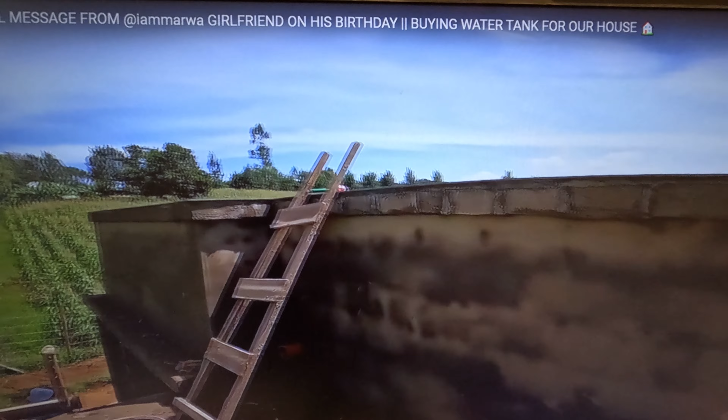Here we go. Already this place has been plastered and so I'll just rewind a little bit so we get the context.

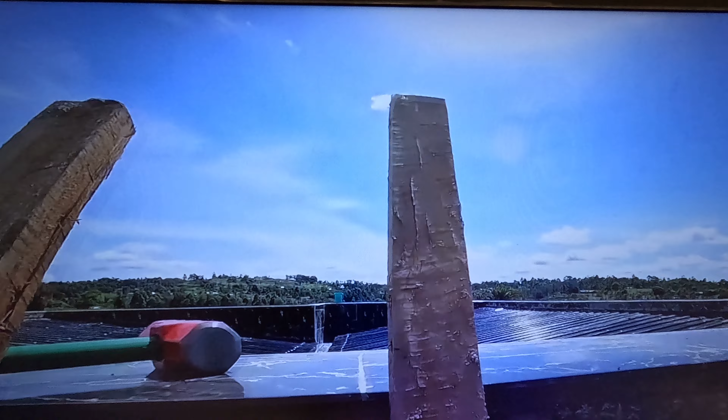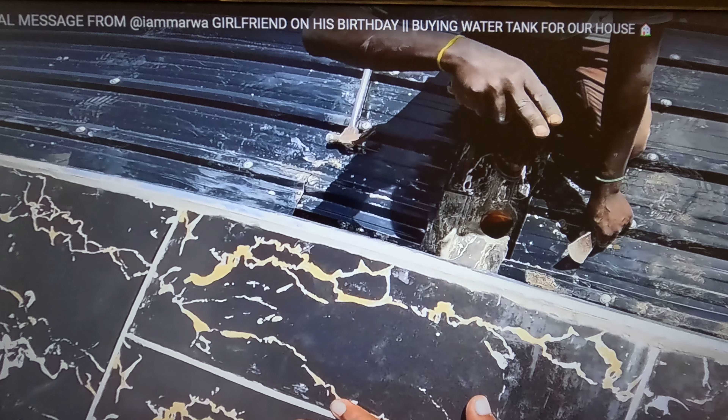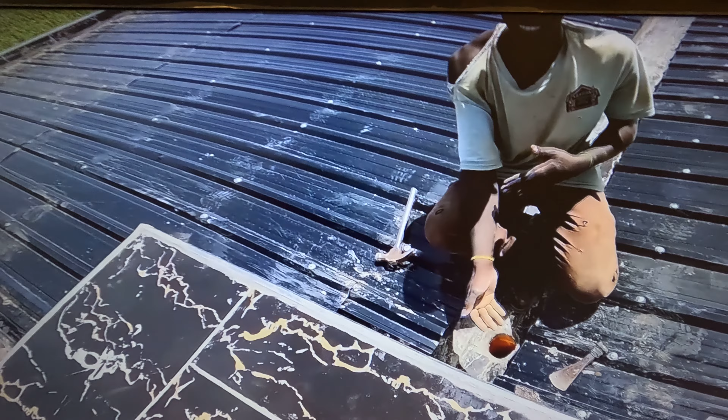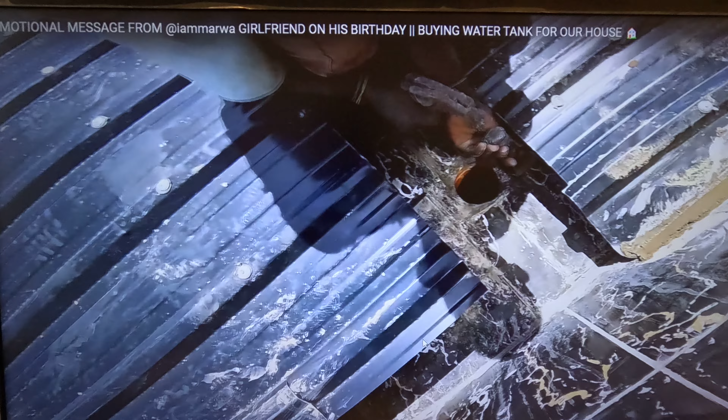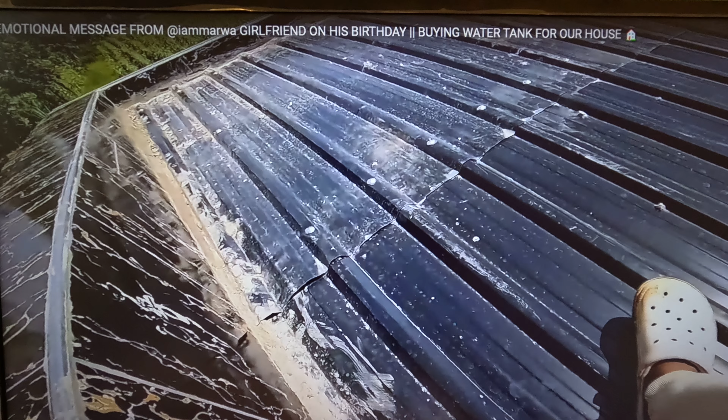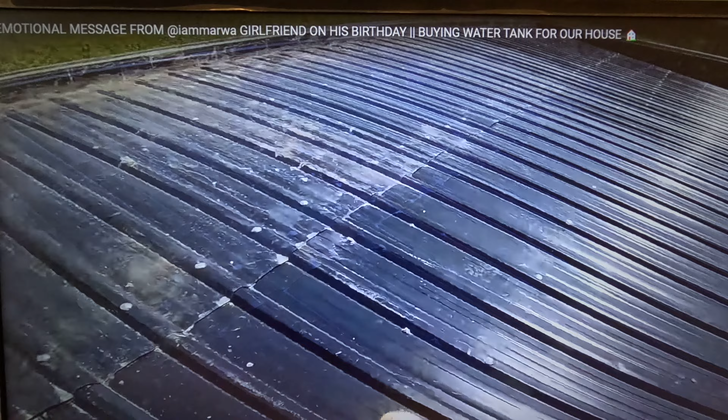So, nice. So basically, the way they're constructing this house, this is a typical example of a hidden roof construction. So this is what they're calling a parapet. So this is your parapet wall. I'm assuming it's about, I don't know, maybe 400 millimeters high or 0.4 of a meter. That is your roof there. And then if we continue watching, the hidden gutter is there, right? So what they have been doing now is tiling the roof. You can see the guys tiling.

Okay, so he's basically explaining how the roof looks. So you can see that is the external wall. That's the external parapet wall right there. And then the roof is sloping inward. One side of the roof is sloping inwards, and then the other one is also sloping inwards, and they meet somewhere at the center, and right there, that is your internal gutter.

So this is what they're calling the hidden roof, because when you're standing on the ground somewhere here, you won't see the roof. You just see the parapet walling. So this is called a parapet wall. And it varies in size, depending on how you want to do it. If you're doing this type of roof, your parapet really should be a minimum of 300 millimeters high.

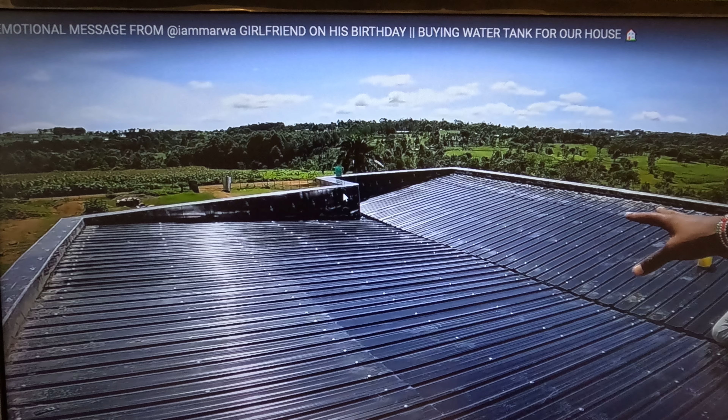And this side, of course, it can vary as well. This just depends on the slope of the roof. This is probably about 11 degrees or something. So let's continue watching, and then I'll come back and take you through stage by stage what are some of the things that they've done right and some of the things that I think they could improve on.

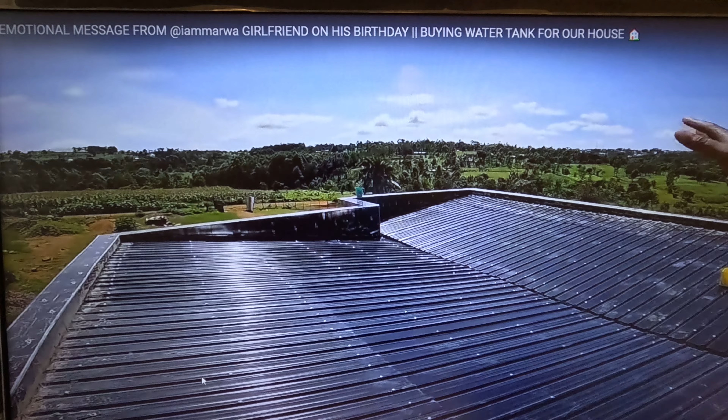It's really, really beautiful, so beautiful. I'm just standing on top of this roof, and guys, thank you so much for giving me a place I can call home. Thank you to everyone who has been supporting me, encouraging me. Right now, Nasto can proudly say that we have a home here. So this is the house, guys. It really looks beautiful. Just look at how the iron sheets look. Very nice. Thank you to everyone who has been supporting me since day one, liking my videos, watching my videos, sharing them. A big shout out to you all.

Right, so let's go back. So we've seen what that roof looks like. I'm just gonna turn the camera around, and then I'll take you through the things that I wanna talk about that they can improve.

Go. This is now the gift I can say that I can give to you guys for supporting me wherever you are.

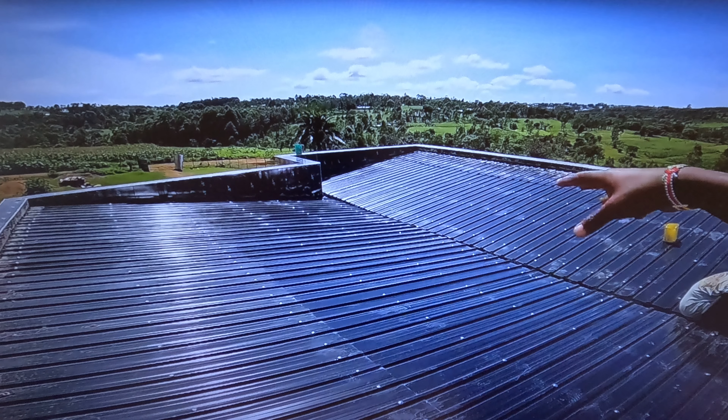Right, so as you can see, the YouTuber, I think this channel is Nasto, he's very proud of what he has achieved, and it is very commendable. Like I say, it's a very commendable effort because it's not easy to build this size of house. It's very tough. But I want to point out something now. You notice this internal gutter, the way they've done it. Just a moment. Somewhere here. There we go.

Right. So this internal gutter, if you notice the way they've done it, it's very rudimentary. It's very basic. So they've got the iron sheets coming down, and then they've tiled it here. So they're using tiles as the base. I'm not sure what the tiles are lying on, but what your tiles lie on has to be really robust. And then I don't see any waterproof membrane, although in the video he talks about using waterproof cement to waterproof the gutter.

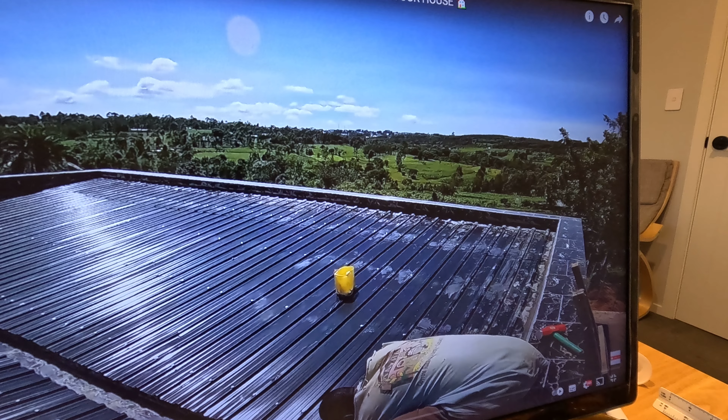And then you notice on the parapet wall, they are actually tiling it. I'm not sure if the tiling of the parapet wall is a good idea. One of the problems is that tiles are a very brittle material, and in Kenya we normally have some hailstorms, so every time the hailstones hit the tiles, that impact will eventually cause some cracking. And when the cracking happens, it's only a matter of time before the tiles tear apart and expose the parapet walling, and then cause some leaking.

So you combine the impact of the hailstorms and the expansion due to temperature change, then you find that maybe it's not such a good idea to use tiles on top of a parapet wall, or even on this internal gutter. And then you look at the joint between the parapet wall and the roof. That's something I'll make another video about and talk about how that could be done properly.

So basically what we're seeing here is that yes, the roof looks nice. The use of these ribbed corrugated iron sheets is really nice. They're beautiful to look at, but when you look at this internal gutter, there's quite a few things that could have been done better. And so I want to show you how. So I took the liberty to draw up what a typical internal gutter looks like.

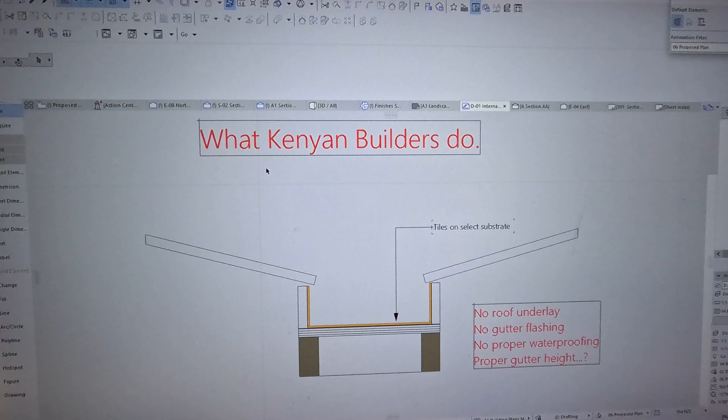So on my drawing here, I have what I've labeled what Kenyan builders do. This is your typical cross-section of an internal gutter that we've just observed, which I drew just by looking at that roof. I'm assuming they are supporting that internal gutter with something at the bottom. I'm assuming between the trusses they've laid timber battens, 90 by 45, running horizontally along the trusses.

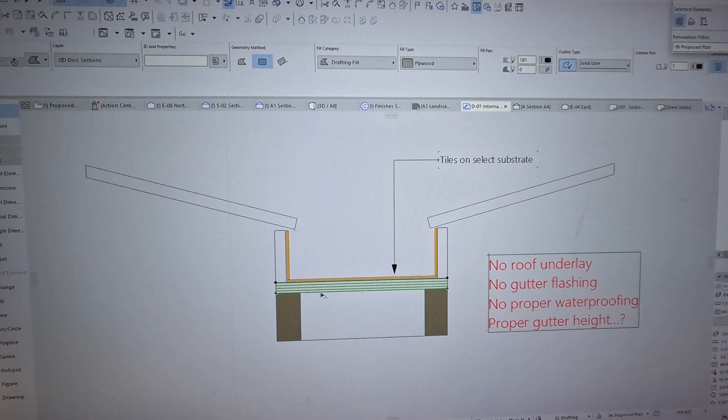And I don't think they used plywood as a substrate. They might have used something else, but ideally they would have used plywood. Anyway, whatever it is they used, there is something there that the tiles are lying on. And then they have placed their tiles on grout. Now the other problem is I don't know what the depth of that internal gutter is.

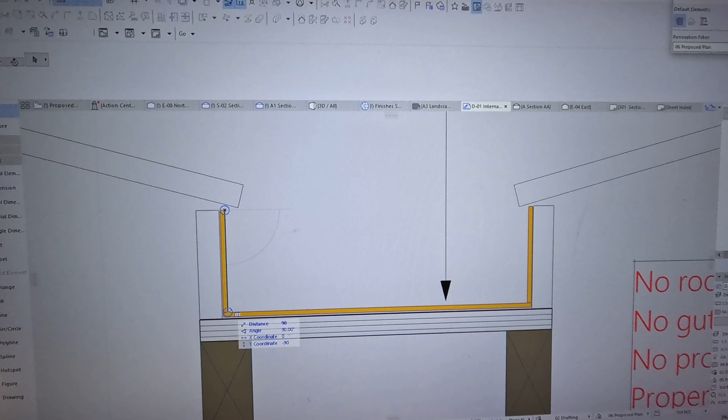There's a standard depth that it should be, and just from looking at the picture, let me see. I don't know what that depth is. It looks to me it's a very shallow depth. It's probably not deep enough as the required minimum. But nevertheless, let's see what they can do to improve that gutter.

So back here on my drawing, one of the things that I point out is that there's no roof underlay. I didn't notice any roof underlay in the video. When you watch the whole video, they show you under the roof and all the roof structure and stuff. I did not notice any roof underlay. I haven't noticed any gutter flashing, which just prevents water from coming back in. And then there is no proper waterproofing, and then is the gutter height proper or appropriate?

So with the gutter flashing, the thing is that there's normally a lot of rain in Kenya, and when it rains and this gutter floods, chances are that without the necessary flashing there, even if they've put, I'm aware they normally put some sort of sealant here, but even if they put sealant, the sealant with time comes off just due to wear and tear and temperature changes.

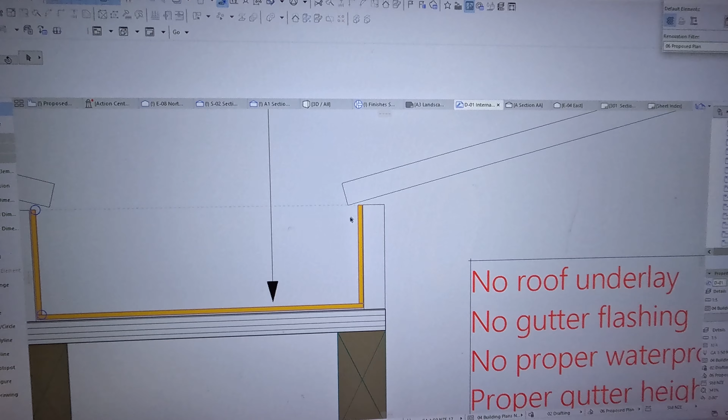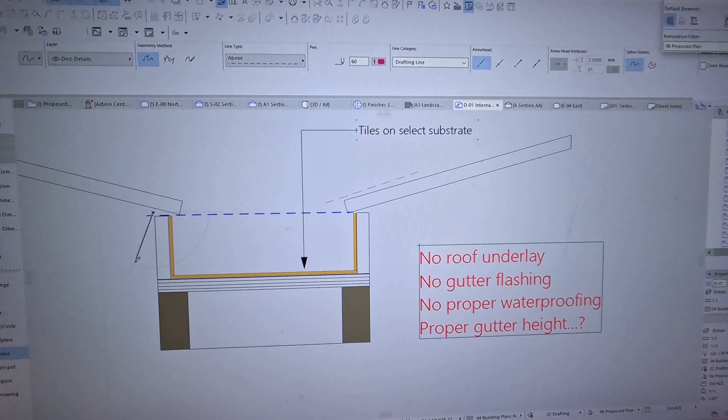So when there's too much water falling here and it floods up to that level there, for instance, some of that water will probably just rise and can overflow inside here, and then down this way. So water will most likely overflow down the sides of that gutter if there is not any proper internal flashing or membrane. So that's one of the main issues with this sort of construction that we've seen, that some of these guys are not observing.

And then the other thing is that roof underlay does help with the heating and prevention of moisture, so there's not that. And then of course the gutter height, like I said, when you look over here, the depth is not that much, and there will definitely be issues along this edge where the roof sheeting meets with the parapet wall and the tile. But I have a different video just explaining how that could be done properly.

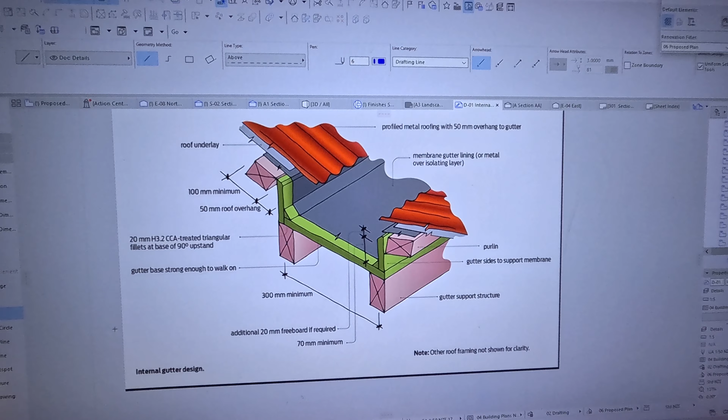So the obvious question is then, how can they do this better? Now, I have here a diagram of a typical internal gutter, which I would like to go through so they can see. Normally, a typical internal gutter is about 300 minimum in width. And then it has to have a gutter base that is strong enough to walk on. So normally we would use 20 millimeter treated plywood, with an upstand base at 90 degrees.

And this height from here to there needs to be at least 90 mil or 100 mil. And just to make sure that there isn't overflow, the required minimum is 70, and then you need to have like 20 millimeter freeboard. Now once you've laid your base, which is 20 mil treated plywood, then you need to have these triangular chamfers.

First of all, you need to have these gutter sides to support the membrane, and then you need to have these sloping triangular wedges that will help water from this membrane flow into the middle of the gutter and then out. So you have the base, then the waterproofing membrane, then the roof underlay there, and then you have your roof.

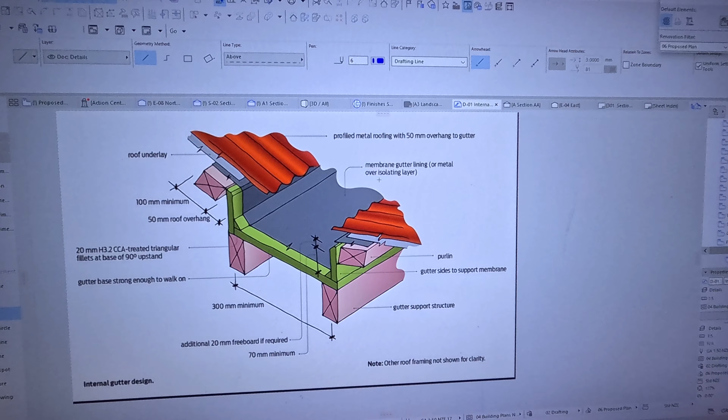The other thing that we need to consider with an internal membrane gutter is that this lining could either be a membrane gutter lining, which is a special membrane that is waterproof, or it could be a metal over an isolating layer. So you could have a metal gutter over here, but then between the metal gutter and the plywood base, you need to have a waterproofing substrate or layer there as well, right?

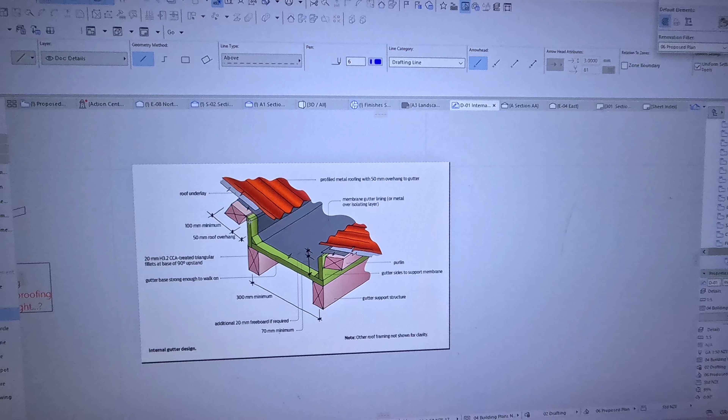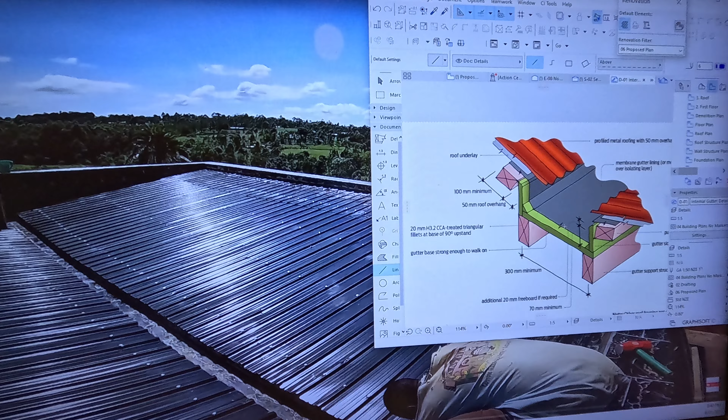So this is your typical internal gutter design, and this is how it really should be done in order to ensure that roof doesn't leak. So now you can try to compare this internal gutter with what has been done, guys, with this sort of construction, and see if there's anything that they can improve here.

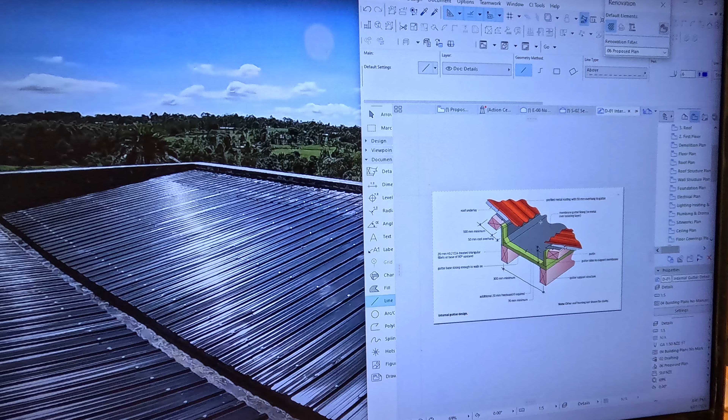So like I said, they're using tiles, which I'm not sure we should be using there. And also the waterproofing, I haven't seen any. They're talking about using a waterproofing cement. I'm not sure they can do that. I mean, you can use waterproofing cement, but I'm not sure how it's gonna work there, to be honest. However, this is just to point out how they can do it properly.

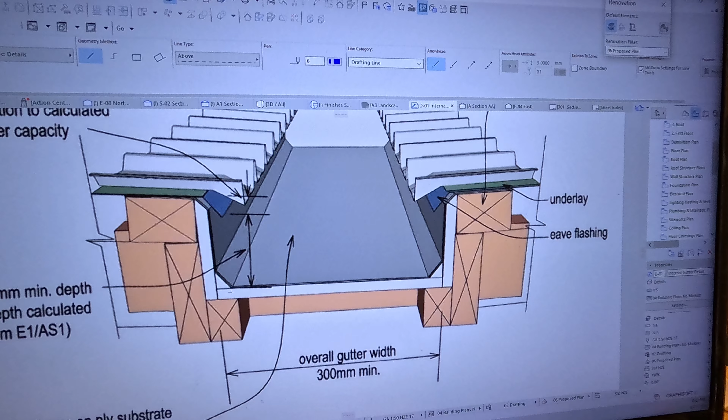And then another variation of this is, so here I've got another diagram that shows clearly how it can be done as well. Again, this is overall gutter, which should be 300 millimeters on membrane or ply substrate, and then the membrane has to be taken, if I zoom in, closely over the roof purlin, and then the gutter has to be 70 millimeter minimum depth.

You have your roof underlay overlapping the gutter membrane, and you have your eaves flashing there, and then that's your metal roofing. Like I said, again, this could be a special waterproof membrane, or it could be a metal gutter. And metal gutters in Kenya, someone may ask, how do we get a metal gutter?

You could go to the Juakali guys along Jogoo Road, and they could actually prefabricate a steel gutter for you. Just make sure it's stainless steel, and then once you put it over this ply substrate, you make sure you put a waterproofing membrane sheet, or DPC, or butynol. Butynol can work. So butynol over plywood, and then you can put the steel gutter on top like that.

300 overall minimum. Personally, I normally just go for 510. The reason being that 510 millimeter wide is good enough for a shovel to walk through if the gutter is flooded with debris. And then another variation of that, and this is what I was talking about, the parapet wall.